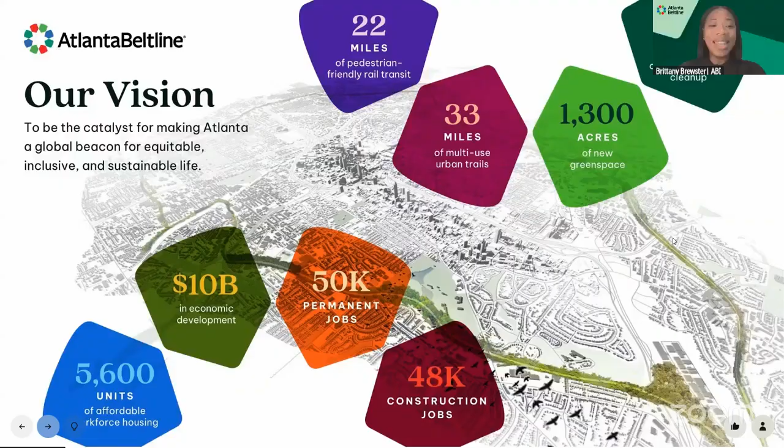So with that, I'm going to turn things over to Andrea Foard, Senior Development Manager. Thank you, Brittany, and good evening, everyone.

On this next slide, I'll start by providing a high-level overview of our Murphy Crossing concept plan that we shared in the spring. At full build-out, the redevelopment is planned as a mixed-use destination that combines housing, employment, retail, and light industrial uses. The concept plan currently includes approximately 625 residential units, creating new housing opportunities in the neighborhood along this segment of the Beltline Trail.

In addition, the project contemplates roughly 256,000 square feet of commercial space comprised of office, retail, and light industrial usage. The goal is to create a development that supports new and existing residents and generates jobs, entrepreneurial opportunities, neighborhood-serving retail, and long-term economic activity.

So while this represents the ultimate vision for the site, development will occur incrementally through multiple phases to align with infrastructure needs, market demand, and community priorities.

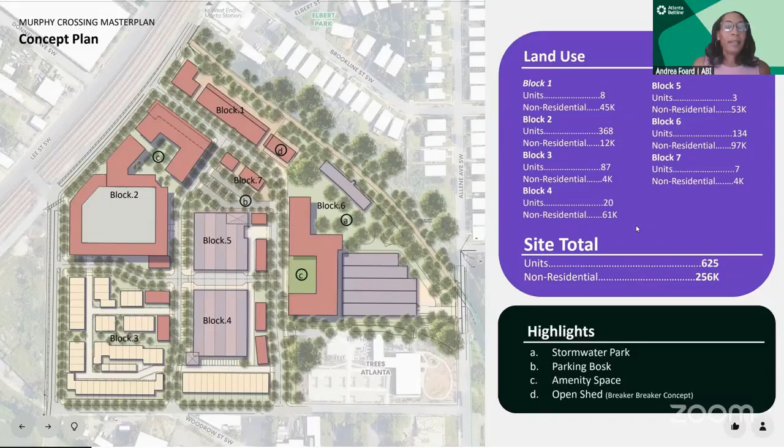Next slide. To bring that vision to life, Murphy Crossing is planned to be delivered through at least 5 phases of development. Phase 1 began this summer, and it serves as the foundation for what's to come in subsequent phases. This first phase focuses on 4 main areas.

It includes most demolition activities across the site, removing existing structures that are no longer needed while preparing development parcels for future phases. Second, phase 1 centers on the adaptive reuse of 2 buildings: the Archives building and the curved brick egg building that's located along the Beltline Trail.

Third, we'll advance key roadway and pedestrian improvements that improve circulation and connectivity throughout the site. Fourth, we'll install a stormwater park that's designed to handle the majority of the site's stormwater needs while also creating a meaningful open space amenity.

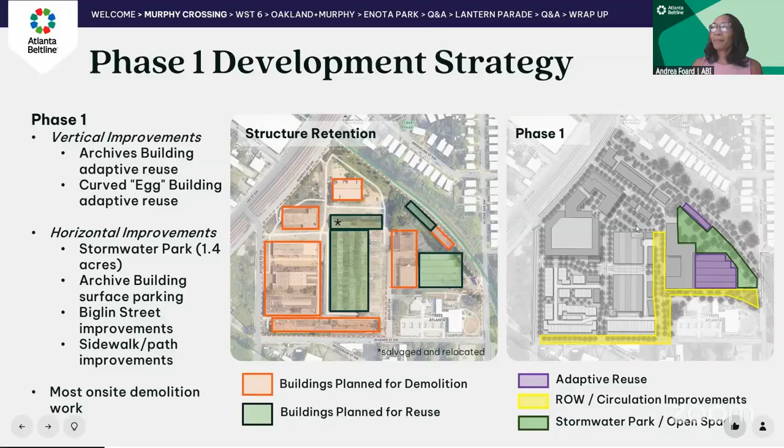An important milestone in advancing phase 1 has been the Special Administrative Permit, or SAP, process. Our SAP application requested approval for the complete demolition and removal of 8 existing buildings, along with partial demolition of 2 additional structures that will ultimately be adaptively reused and incorporated into the redevelopment.

Last month, our project received conditional approval for vertical-only demolition activities. This approval allows our team to move forward with demolition planning while additional redevelopment details continue to be refined. The SAP review process will continue as vertical redevelopment documents are submitted for future project components, and community engagement will remain an important part of the process as those phases move forward.

Turning to demolition and implementation, the project team is currently working to procure a demolition contractor. An invitation to bid was advertised earlier this summer, and we are working through procurement and contracting. Simultaneously, the team is working on demolition permitting activities such as lot consolidation, pre-demolition environmental work, and submission of final demolition plans. The current schedule anticipates demolition beginning this fall, with work expected to take approximately 5 months to complete.

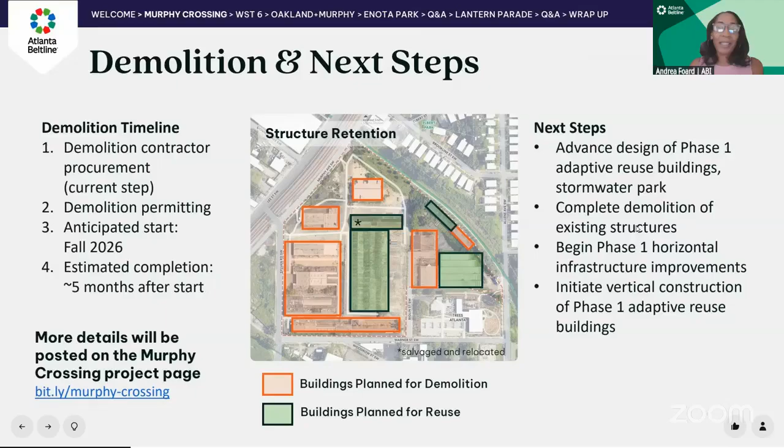We will definitely share more information as we solidify details around demolition activity and our phase 1 design, and we appreciate the opportunity to give you all this update this evening. Thank you.

Hi, my name is Andrea Greco. I am with Route Design Studio. I'm the project manager and landscape architect working on the Westside Trail Segment 6.

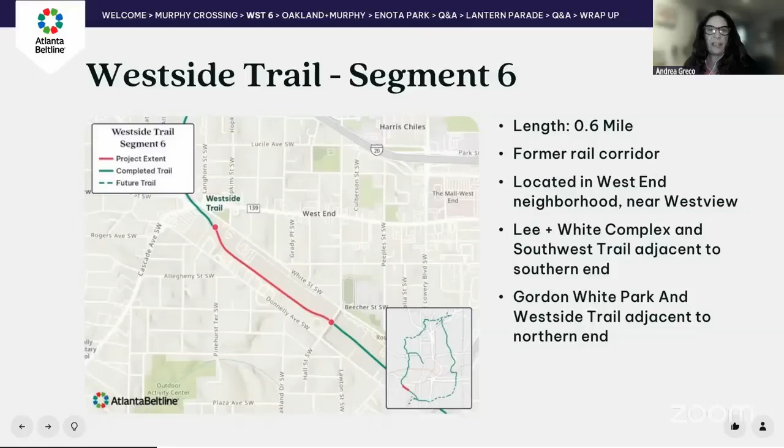This trail segment is a little over half a mile and is part of the former rail corridor. It's located south of I-20 and just west of 85, in the West End neighborhood near Westview. On the southeast end of the project is the Lee and White complex, and also that segment of the Westside Trail that's already built. On the northwest side is Gordon White Park and another segment of existing Westside Trail, and there's also a Kroger in that area.

And this trail will also have lights and cameras, as do most of the other segments along the corridor. We will be addressing much of the stormwater with bioswales in this area as well.

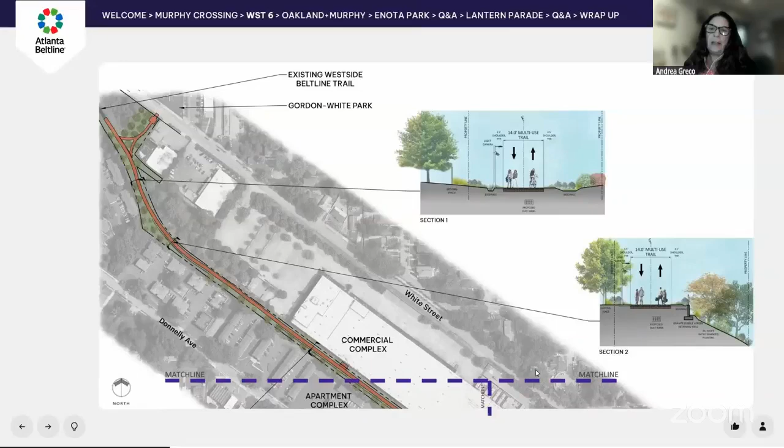Coming further down, we are going through an area adjacent to apartment complexes and commercial complexes, potentially some areas of redevelopment as well. There are some adjacent grade changes, so we will be using retaining walls extensively along the side of the corridor, and you can see that on the bottom right image of the section with that retaining wall that helps us level out the slope for the trail.

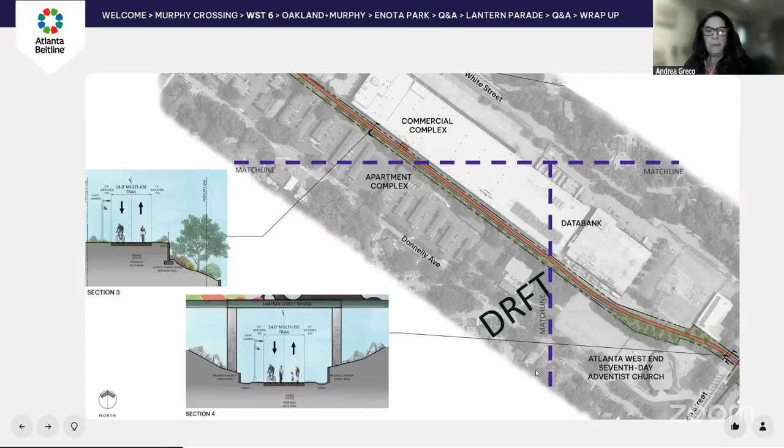Coming a little further south and east, we pass along a building with some existing businesses in there already, the commercial complex that's labeled there. And the trail keeps going. There are some tie-ins to that facility as well in this area. More of the standard retaining wall that'll have a granite finish, and it will have a stainless steel guardrail on top to protect users from the drop-off in this area.

Coming further south, we come down, and the trail angles over a little bit, and we come towards the Lawton Street intersection, where currently you can kind of see this area. There's a ramp at Lawton Street that's existing that will continue to exist in this area. The trail will come under Lawton Street and come out the other side, and we are reworking the area to connect into the existing ramp and the existing trail so that there's a smooth transition between all these entities.

The trail will also have a great deal of landscaping, a combination of native and adapted plants, planting trees in correlation with the arboretum that the Beltline is known for at this point. And as I mentioned, bioswales to address water, lights and cameras to address safety and use for when it gets dark out there as well.

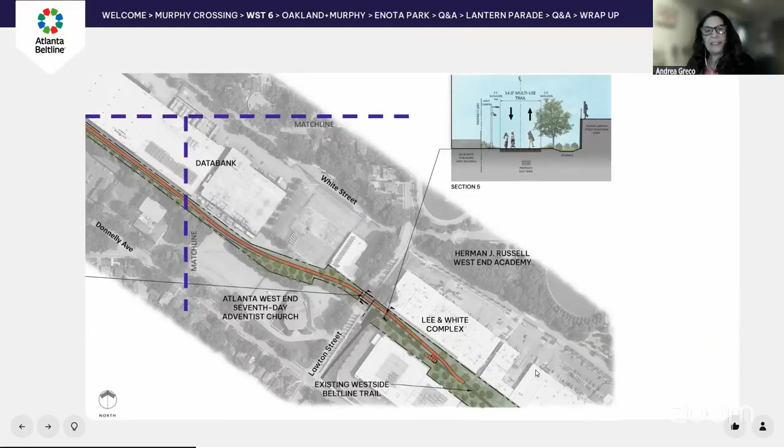Here we have some renderings of what the trail will look like. This is on the northwest side of the trail, not far from Gordon White Park, which is off screen, off to your left there. This is that existing spur that heads over that way, and you can see how it'll be enlarged and come together to just create a unified corridor.

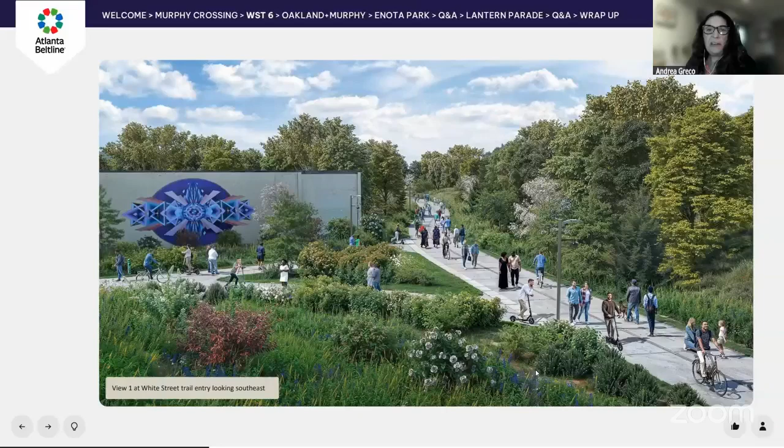This is back at the other end of the trail. This is the southeast side, and we are looking from above, looking towards Lawton Street, which is the street in the background, and you can see the trail going under that. You can see that existing ramp over to the left there and how we will tie that in with a plaza with some seating at that area where you can wait for people, make a plan to go for a walk, that kind of thing, and safely get on the main corridor.

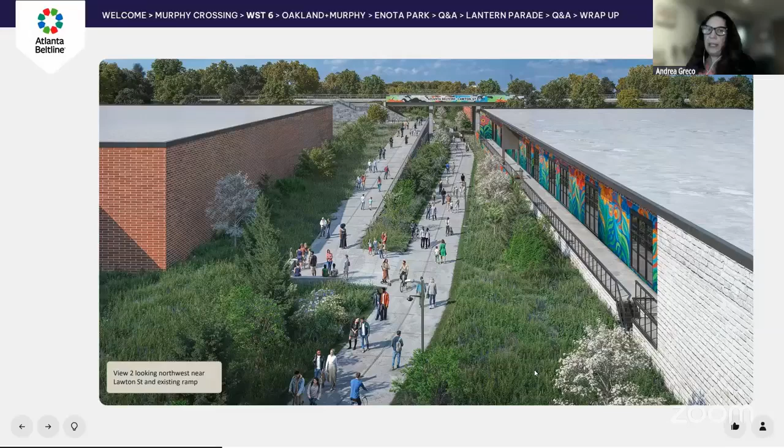And you can see the dense amount of plantings that'll be included in the project as well.

Next slide. This image is in the same location, just looking a little bit closer in, so you can see how that trail extends through under the Lawton Street overpass in that area, and you've got a clear view. It's pretty open in there. There'll be some more retaining walls on either side of that to address the slopes underneath the overpass as well. But it'll all be uniform and coherent and get you where you need to go and keep going.

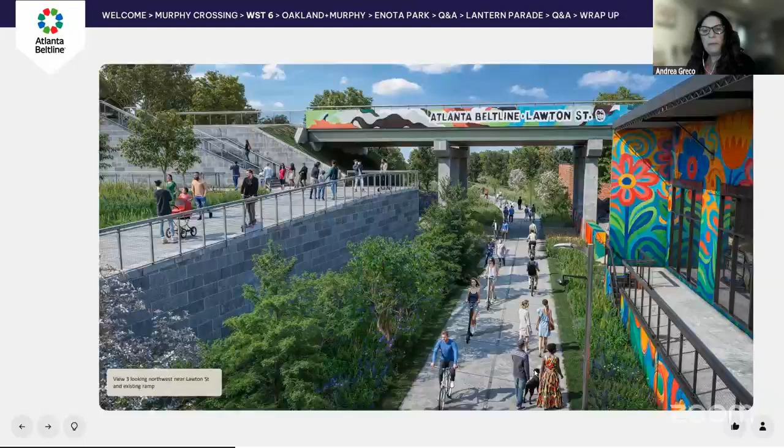So right now, we are in the permitting phase of the project. We've submitted this month. We are planning on going to bidding this fall, and it likely will be a two-step process with soliciting for quals and then getting hard numbers of bids from the contractors. Then going to construction by spring 2027 through about spring of 2028. So we're on track to get this done as quickly as we can.

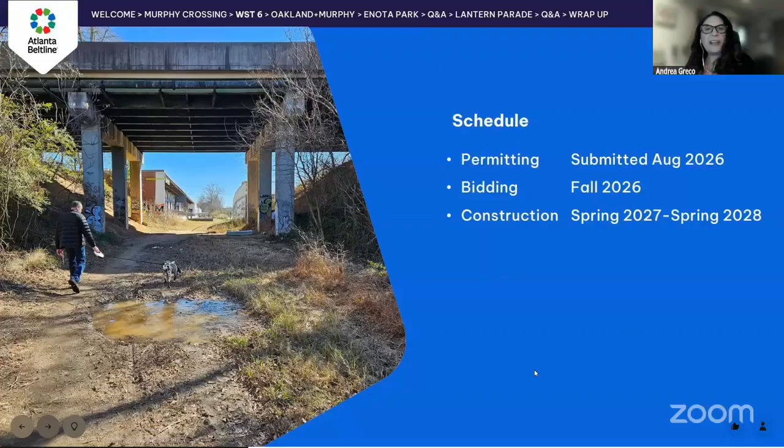Next after me, Carley Rickles with Martin Rickles Studio will be talking.

Thanks, Andrea. I'm Carley Rickles with Martin Rickles Studio. I'm a landscape architect and the design lead of the Oakland Murphy Connector Trail. And we can go to the next slide.

This section of trail connects from the Southwest Beltline Trail to Murphy Avenue as well as Oakland City MARTA. It's just shy of 1.5 miles of trail, and as you can see in yellow, it splits into those two sections. It's also located just south of Adair Park and touches Capitol View as well as Oakland City.

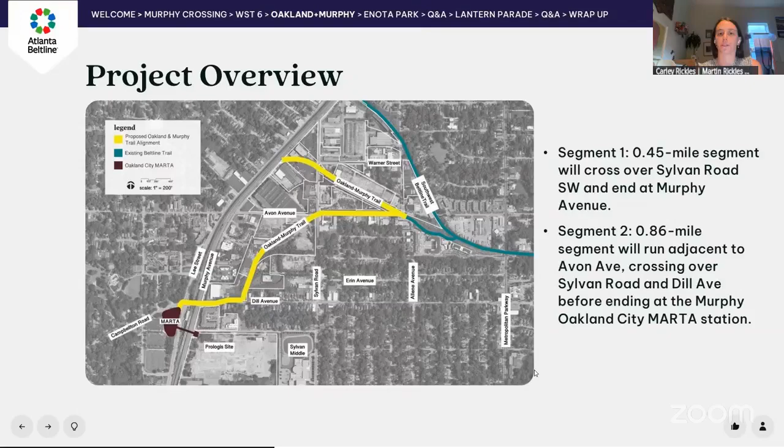So our project timeline: we've just completed our 90% plans and are gearing up to submit for permit. We have received a permit from Atlanta Parks Department, which I will share a little bit more about in a bit. We'll be wrapping up our construction documentation in the fall and shooting to begin construction in early 2027.

So tonight we're going to focus on some of the design highlights of the trail. It's a lot of trail and a lot of awesome other amenities that go along with it.

So here on this map, what you're seeing are in green some areas where we connect to MARTA bus as well as MARTA rail. You can see in the bottom left, the southwest, that's Oakland City MARTA that we are connecting the trail to. In blue, you can see there's a new public park that we're going to look at tonight that we have designed in association with this trail.

We've also got a number of plazas and public spaces coming to this area with the development of the trail. And in red, while the entire trail increases walkability, there's also some key intersections where we've designed safe crossings. We want to highlight that all these things combined improve the public realm, ecological health, social health, mental health, and physical health.

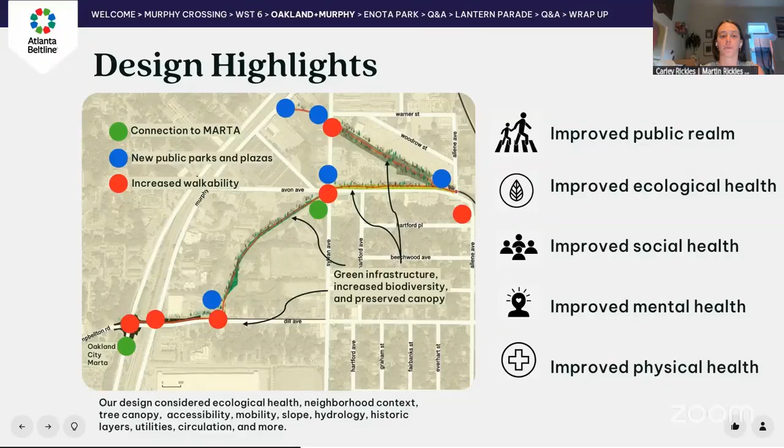Next slide. So first, we want to talk about the Oakland and Murphy Park that will be coming to the intersection of Allene and Avon, just west of the intersection. This is an area where we've designed nature play for all abilities. This is going to be one of the first, if not the first, official nature play landscape in the city of Atlanta through the city's park system.

It has a number of large and small gathering areas that may potentially be rentable for events, and just really nice places for everyday visits to the park, some nice shady spots for caretakers or people to take a rest while traversing the trail. And of course, it also brings access to nature.

We just really want to emphasize that we've prioritized thinking about play areas for a number of different age groups, and want it to feel like a welcoming place for people to have access to nature.

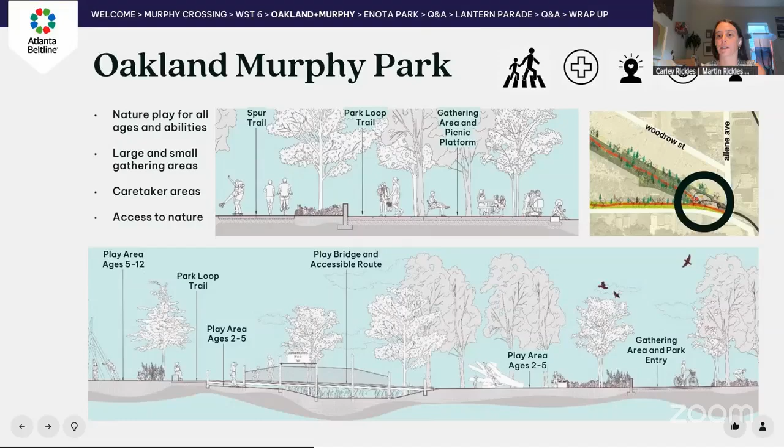And so with that, we're going to jump right into some questions for the audience. Everyone should be able to take a photo with your phone of this QR code, and as you answer these questions, they're going to show up on the screen. We would love the participation of you all from the audience. It looks like there's a code, use code 87148913 to join. So first question: what neighborhood do you live in?

We talked about how this park is near a number of different neighborhoods, but we're also curious about park users that might be traveling by bike or by car to this area, and want to really think about the greater Atlanta community as we're designing this park. It looks like we've got some people from Pittsburgh, Capitol View, Adair Park, Oakland City, and some other neighborhoods as well.

All right, next up, as I just talked about, this is an all-ages playground. We are thinking a lot about age inclusivity, and we're curious about just what age group is going to be using this park. We've got age areas for even as young as 0 to 2. We've designed a walking loop and a number of fitness opportunities. And we're also thinking about areas for teens to hang out, so there are some fun group swings and really just areas to sit and be and socialize safely.

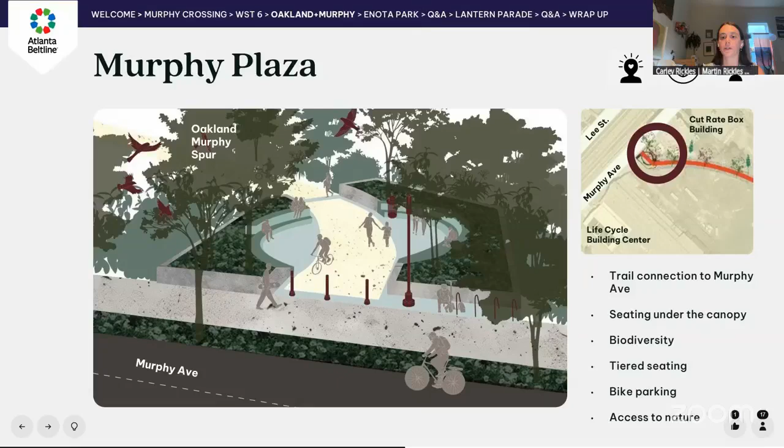In this area, we have a shady and lush tiered seating patio - you can see in yellow in the middle, the trail will come right through this plaza, and you can sit along the sides and get some shade. The plantings will soften the sounds of the street and form a nice oasis within the city.

The next area we're going to highlight is along Dill Avenue, just about where Division Place intersects Dill. At this point on Dill Avenue, a bike lane was recently installed, and you can see in light green where this bike lane merges to become part of the trail. In yellow, you can see the Oakland Murphy Spur bending around to move west, and we're adding a safe crossing. We're decreasing the amount you have to cross and adding signage and a crosswalk along Dill Avenue, so folks on Division can just walk right across - you don't have to go all the way down to the stoplight just west of this area. You can cross right here, which prioritizes that street connection.

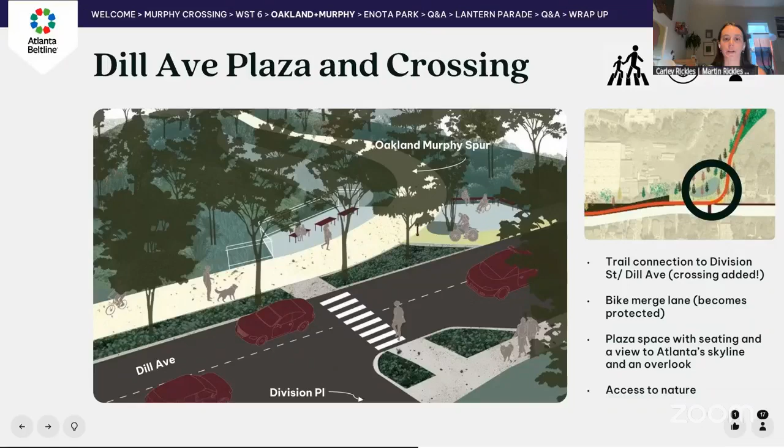There's also, in addition to the trail, some seating areas - what we're calling the Dill Avenue overlook, where you can have a view of the skyline of the city all the way from over here. There are some fun planting palettes inspired by cypress bogs and ecoregions of Georgia. And the last thing I'll share is that the dividing planter is also a green planter, so it's a bioswale - there's some green infrastructure happening on the streetscape as well, with a lot of canopy, so lots of access to nature here.

This is the Campbellton Road / Dill Avenue and Lee Street protected intersection. In a second, we're going to do some more audience questions here.

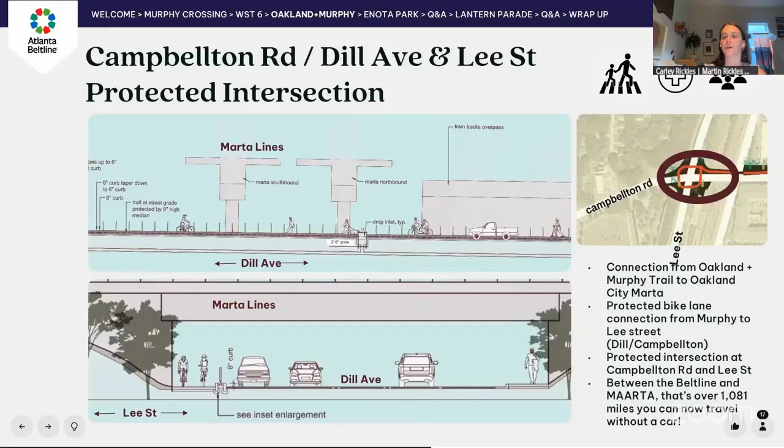Some quick questions about this intersection. How often do you traverse the Campbellton and Lee Street intersection—whether in your car, on a bike, or avoiding it entirely? What's your level of interaction with this intersection on a daily or weekly basis? We're just trying to get a sense of the anecdotal experiences with this intersection.

Next question: how safe do you feel when you travel through the Campbellton Road and Lee Street intersection? If this isn't applicable to you, you can skip it. Your options are: I feel safe while driving my car through the intersection, I feel safe while walking or running through the intersection, or I feel safe while biking or scooting through the intersection. This is on a scale of strongly agree to strongly disagree, so you can rate how much you agree with the statement.

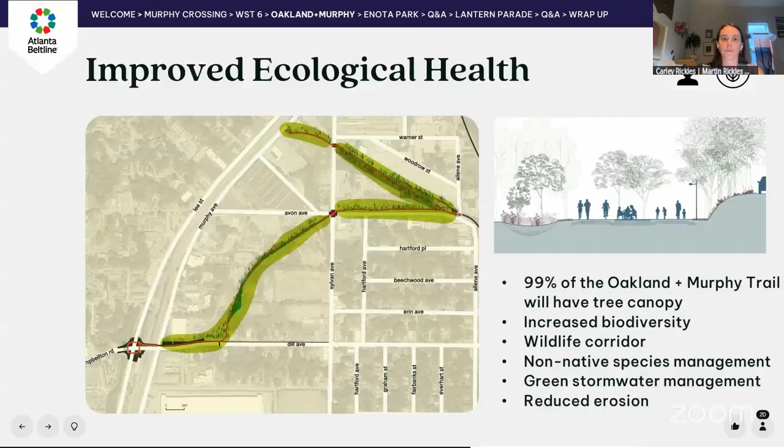Looks like we're stopping here, so let's move to the next item—the improved ecological health of the trail. We're really proud of the amount of tree canopy we've been able to save and build off of here, about 99% if not basically 100%, based only on areas that have to be hardscape like streets and plazas. We've really increased the biodiversity, making this a great addition as a wildlife corridor in addition to a human commuting trail. As with all Beltline segments, there's non-native species management, green stormwater management interventions, and with that comes reduced erosion.

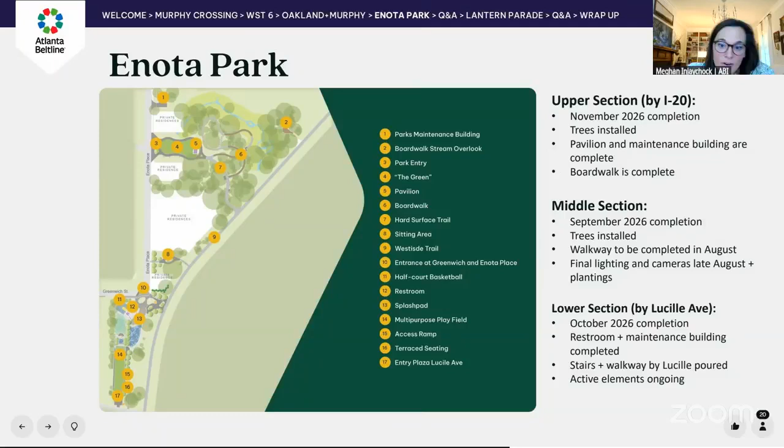There is a ramp actually to the left, so there are 2 options to get down to the field and to the trail. This will have a giant pavilion, shade pavilion over it with a solar array on top of it that will hopefully be able to power the majority of our electrical needs within the park.

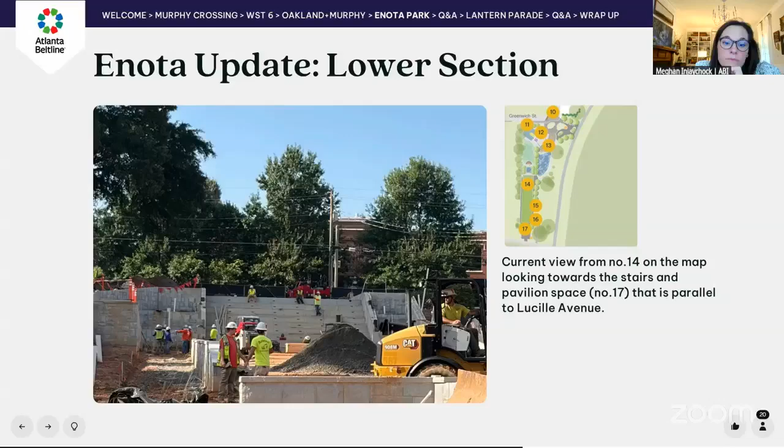So you can choose to come into the park or you can bypass it completely and just go right onto the trail using that. You can also see a lot of the grading work that's taking shape to get the multi-use field in place. Hopefully we will start sodding in the fall.

A lot of the irrigation is going in now. Handrails are starting to go in. Final stonework is being completed, and tree installation will be in winter, so probably starting late December, early January of this year. Some of the landscape plants will go in prior to the opening in the fall, and we are preparing all of the conduit and the light pole bases right now as well, so those are the last things we'll stand up before we open this section of trail.

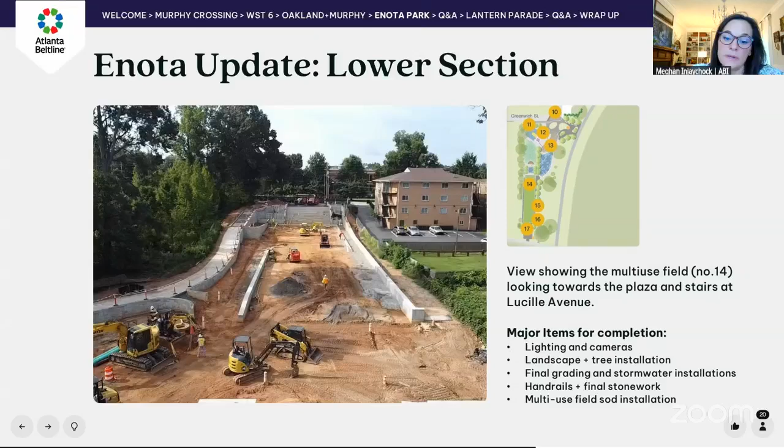And then we're working with the Atlanta Hawks Foundation to do a mural or some artwork on the half-court basketball. I'm not sure what the art is at this point, but I can share that once we get it. Hopefully that'll go in before the opening as well.

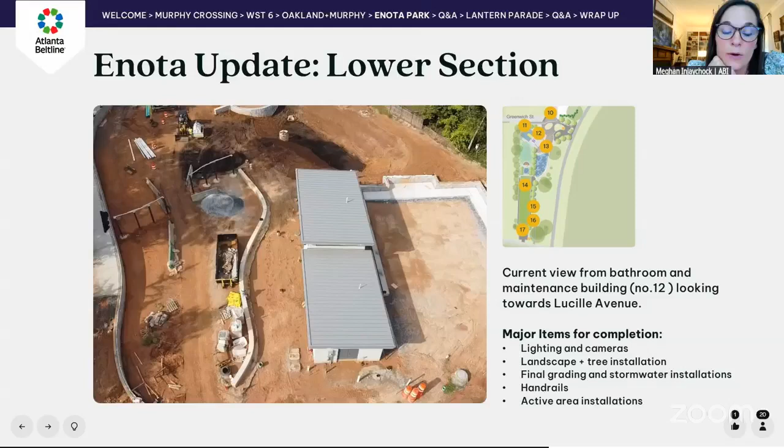We've also got a lot of stormwater to deal with on site, so there is a pond that will be planted out just to the north of the restroom buildings here.

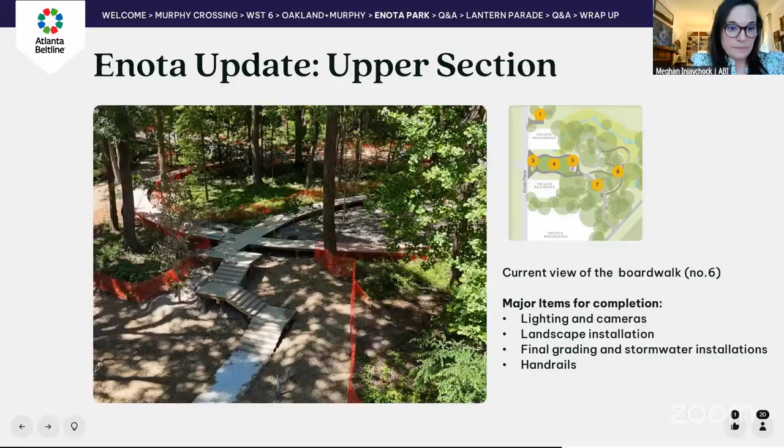Yep, so this is the overlook I was talking about. This will be planted out. We did get a lot of trees in there this year, but there will be more, and there will also be shrubs and some wildflower mixes throughout here.

So this is pretty much done. The handrails, I think, are hopefully going to be done this week on this section, and then we'll start coming in with our lighting and cameras and work our way out.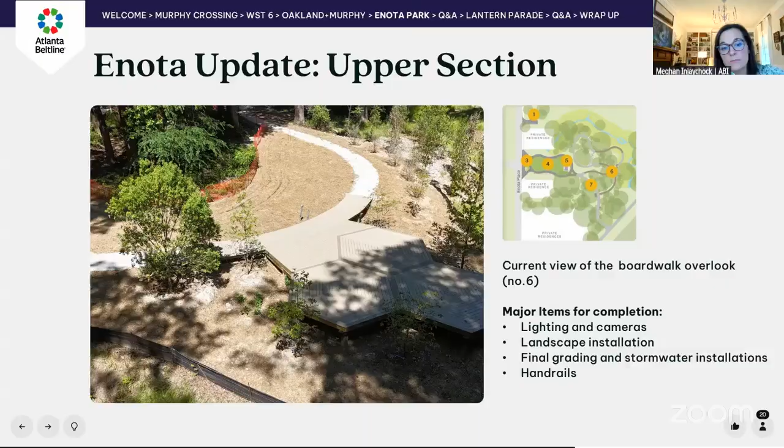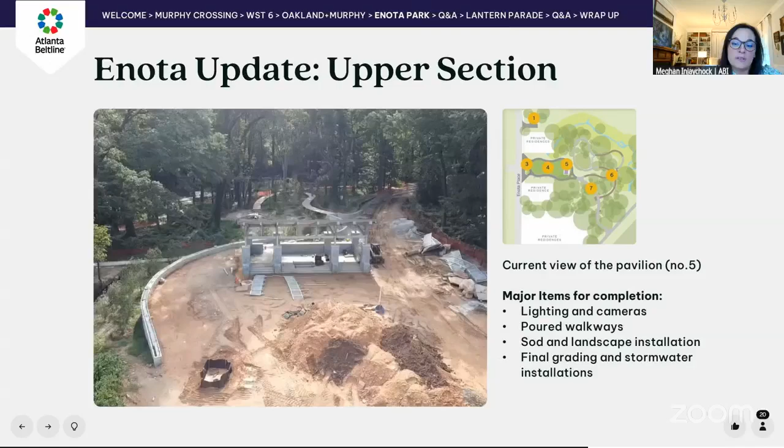Real quick, before I hand it to Nathan, on the middle section: we are fast tracking to hopefully get it open for the community to access the Westside Trail by mid-September. Obviously this is weather dependent, and also dependent on park sign off, since we're doing this on behalf of the Parks Department. They have to sign off on everything before we open it to the public. We don't see any issues with that right now, so we're working hard to stay on track and on schedule for that mid-September opening.

The other two sections are extremely weather dependent. We've had some rain delays this summer, but we're hoping to get the more active lower section along Lucille open by October. The other one might be closer to November, but we'll keep everybody posted on our website and through our meetings.

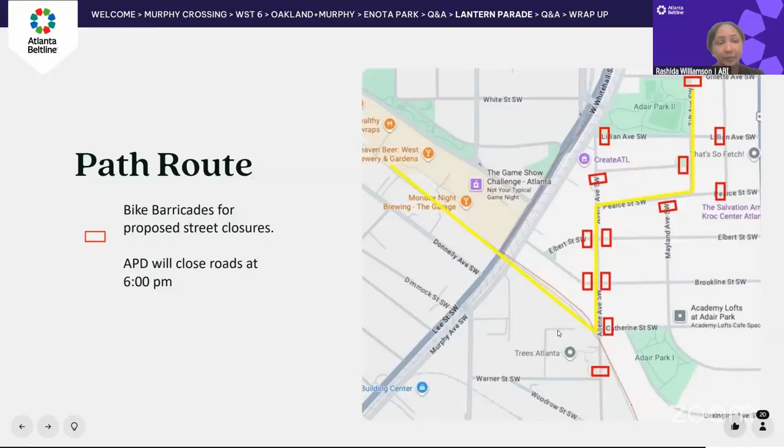If you are participating in the parade, please have a lantern if possible. If you need to stop, we're going to ask you to step off to the side if possible to allow the procession to continue going. If you do have any lanterns that you make from home, we're going to ask that they're not flying lanterns, something that you can physically have in your hand. If you do have any trash, please take it with you, because again, we all are sharing this trail.